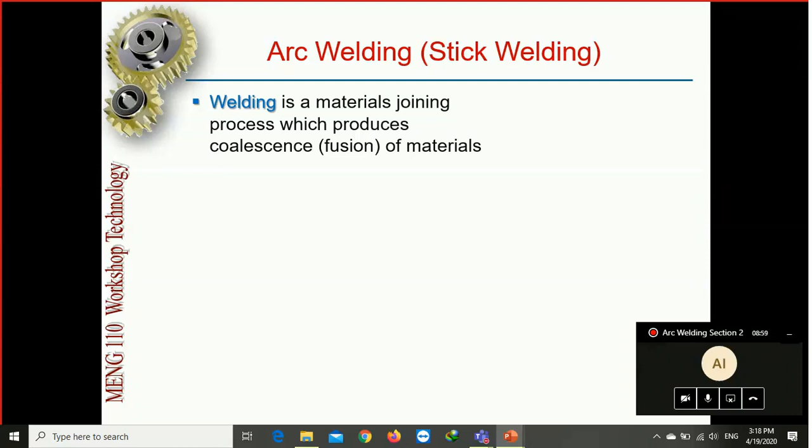Now what is welding? When you are joining two materials together by fusion, the metal will be melted and joined together. So that process is known as welding. We'll be heating the metal up to a suitable temperature, and due to the heat the metal will melt and get merged into each other. So that process is known as welding.

So how can we do it? By heating them to a suitable temperature. This can be done with pressure or without pressure. We can also use a third material, or we can melt the same material.

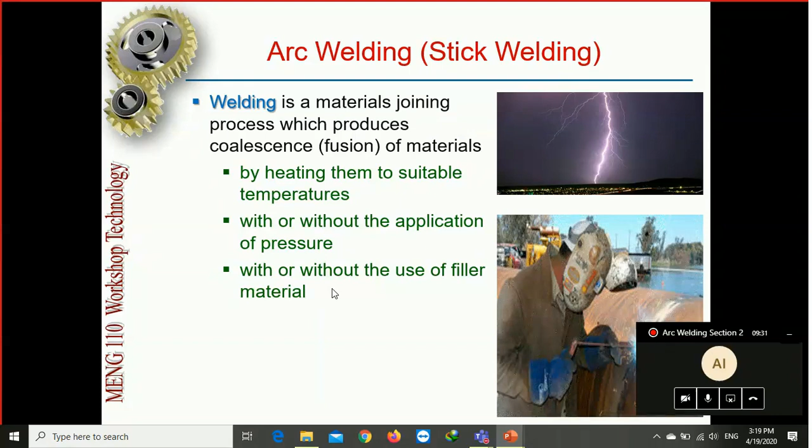So whenever you are welding, these are the safety precautions you need to take care of. There should be a face shield. Always you have to use a face shield, and in some welding you need to wear gloves. Not in all welding, but in arc welding you will wear gloves.

So what are the safety PPE required? Overall, safety shoes, face shield and gloves. And never touch the electrode with your bare hand. Always touch it with gloves, not with your hand.

So the material, wherever we need to join, we'll keep it together and heat it so it will melt, and after melting it will get merged into each other, and then we will allow it to cool. So after cooling they both will join.

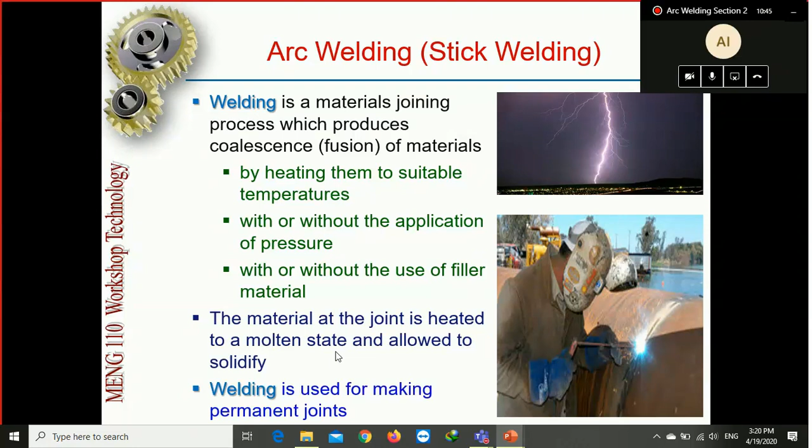So the joint which we are making by welding is permanent, that we cannot break. If it is a screw and thread, nut and bolt, that is a temporary joint, but by welding it is a permanent joint. So we cannot disassemble it easily. We need to break the joint if we need to separate it.

So see what are the equipment required. This is the safety shield. Then goggles, sometimes goggles are required. If safety shield is there, goggles are not required. If safety shield is not there, we will wear goggles.

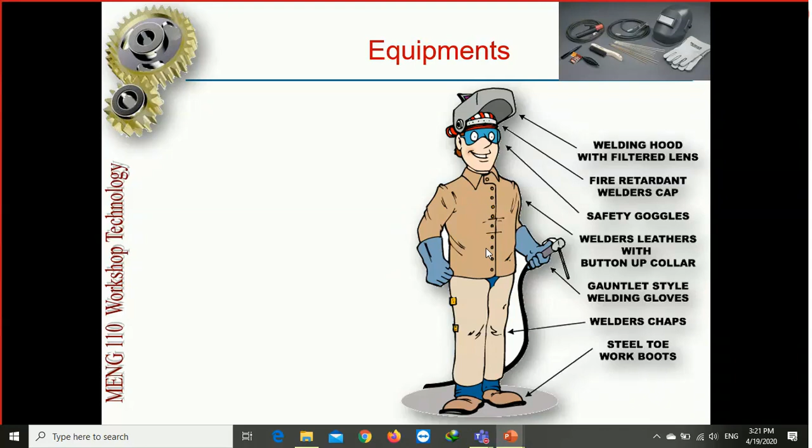Overall, leather gloves, not ordinary cloth gloves. We will wear leather gloves. But welding gloves, welding chaps, and steel toe work boots, safety shoes. So these are the equipment required before welding: safety shoes, overall, leather gloves, and face shield or safety goggles.

Then whenever you are working, what are the requirements for welding? So to produce the electricity, to produce the heat, we need electricity. So from where will the electricity come? From the generator. The generator can be direct current or alternate current, DC or AC.

Then there will be two cables from the generator. One will be connected to the work table where we will keep our workpiece, and the other will be connected to the electrode rod. So you can see this cable. This will be connected to the generator, and the work table also will be connected to the generator. One for work and one for electrode, and electrode holder.

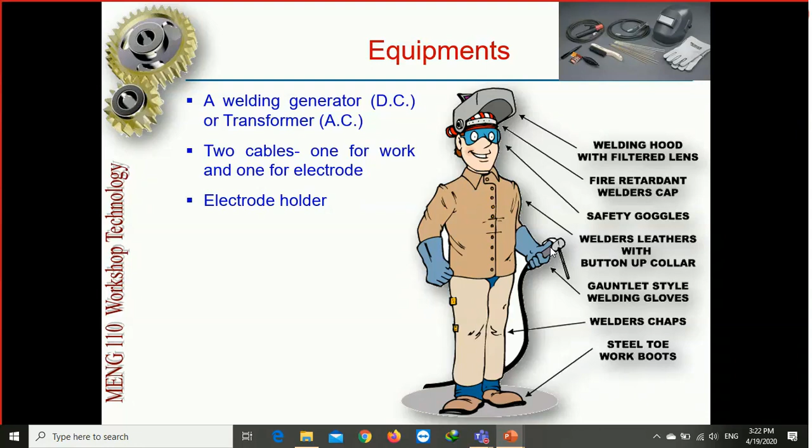Now this is the electrode. To hold this we need an electrode holder, which we will be holding with our hand. Electrodes for welding, then protective shield, gloves, wire brush.

Now after welding is done, there is a lot of carbon on the weld. So to remove the carbon, we will use a wire brush, not with your hand. We will use a wire brush.

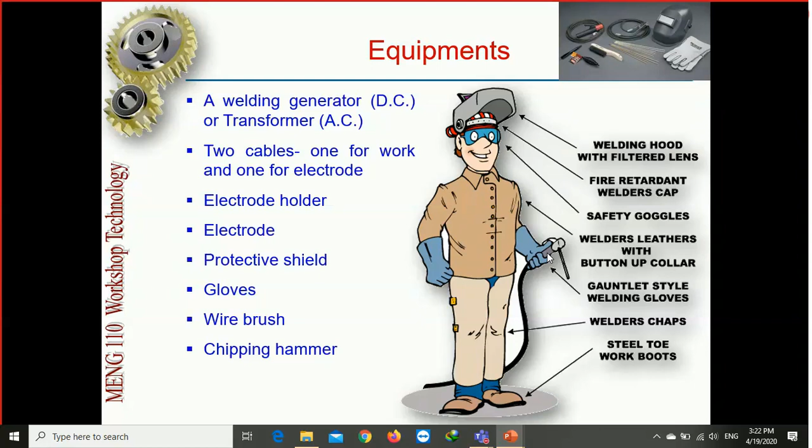Now the carbon is accumulated on the joint. So first we need to break that carbon. After breaking, we can clean it with a wire brush. So for breaking, we will use a chipping hammer and goggles.

See, in welding there is fire produced. So always you should wear proper clothing. If you are not wearing proper clothing, any accident can happen and you can injure yourself.

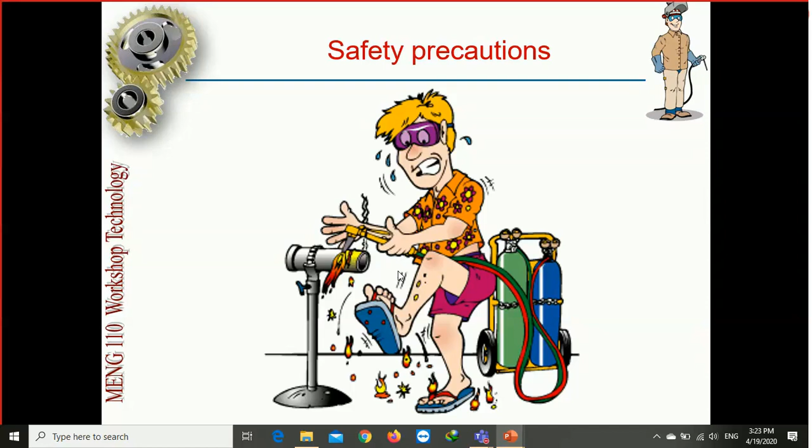So this is gas welding. See, he is not wearing safety shoes, he is not wearing proper clothing, so he can get burned with the fire.

So PPE are a must: all protection, welding gloves, welding overall, apron, everything with safety shoes, welding screen. In some welding, in gas welding, there is no welding screen. But in arc welding, the topic for today, there is a welding screen. We need to hold a face shield. That is the welding screen.

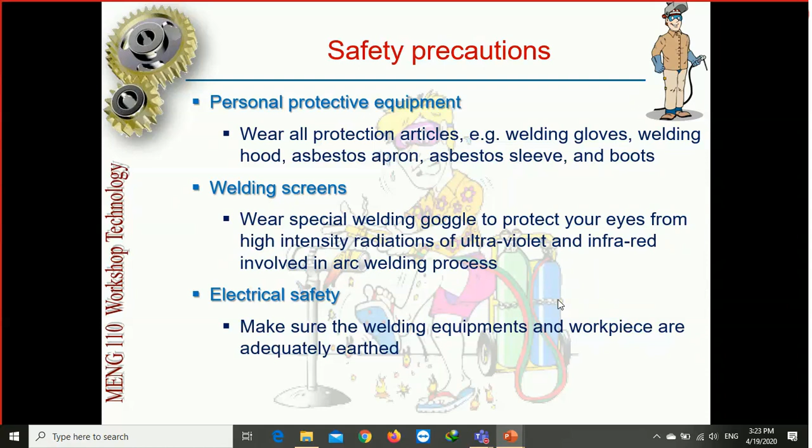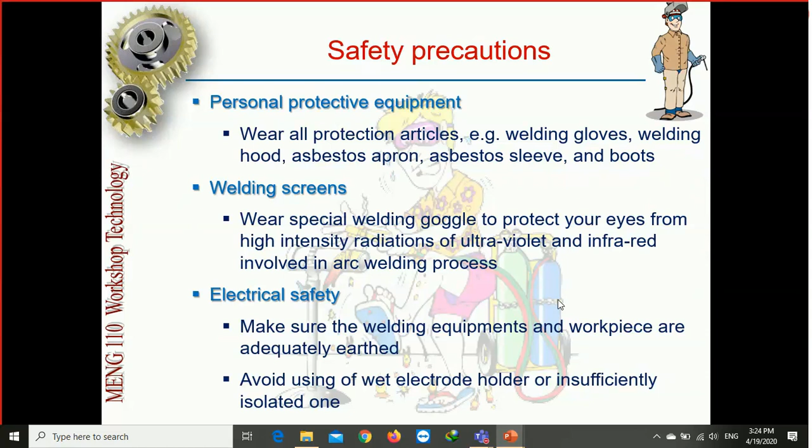Then electrical safety. All the equipment should be properly earthed, otherwise there are chances that you may get a shock. So you need to make sure that the earthing of all the equipment is proper, and the electrode, that all should be dry. It should not be wet.

So these are the hazards which can happen: shock, then due to gases, then burns, then due to rays you can damage your eyes, and if very less space is there you can hurt yourself, you can fall somewhere, your hand can come anywhere, the gas pipe can burst. So these are the hazards which are possible in a welding area.

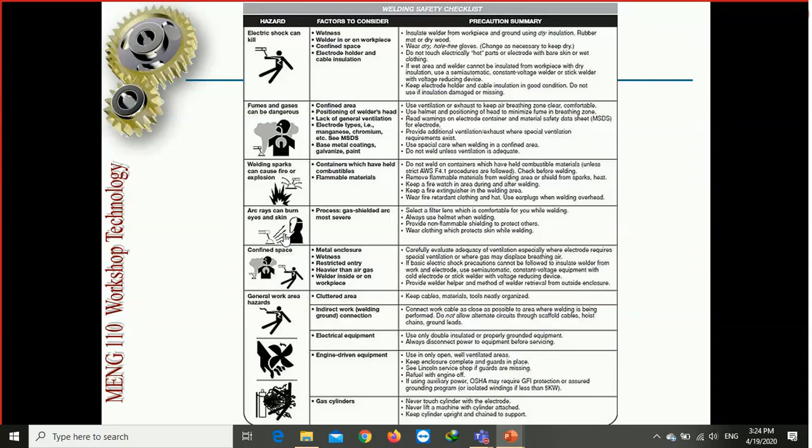Mostly the hazard which occurs is our eyes get infected due to the arc rays. If we see it without goggle, we can damage our eyes. So always we need to wear goggle or safety shield.

Now when we bring this electrode near the work, then a closed circuit is formed, and due to the closed circuit, electricity flows through the circuit and heat is generated. So due to the generation of heat, the metal gets melted, and after melting we can join it as per our requirement. So this is how it works.

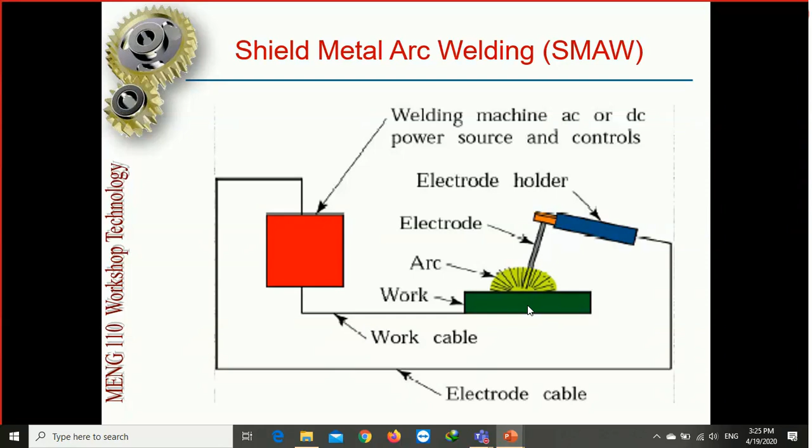Generator, two wires, one to work table, other to electrode holder. Electrode holder, electrode, and that will be brought near to the workpiece. So when we bring it near, a closed circuit is formed, the current will pass. Due to the current, the metal will melt and get fused with each other. So this is the process.

So when we bring the electrode near the workpiece, an arc is formed. An arc is struck between the electrode and the metal. So due to the arc, it heats the metal to a melting point. Now when it is sufficiently heated, we will remove the electrode, which will break the arc. The molten metal will get fused with each other, and then we will allow it to cool. After it has cooled, it will be joined with each other.

So how is an arc? The arc is like a flame of intense heat. So due to the large amount of heat passing, electricity passing through, large amount of heat is generated. That is generated as electrical current passes through a highly resistant air gap.

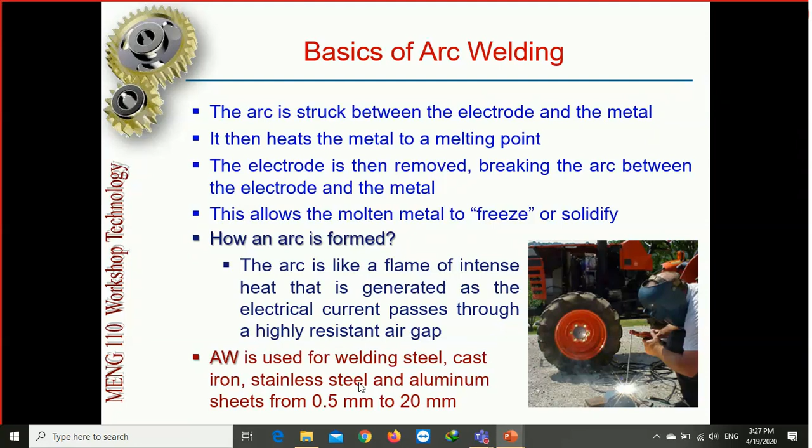Now arc welding is used for welding steel, cast iron, stainless steel, aluminum sheet from 0.5 to 20 mm. So all these places we can use arc welding. Now there are many different welding types, we'll look in further chapters.

Now see, this is the workpiece, this is our arc, this is our electrode. When we bring this electrode, the heat is generated. Now due to this heat, the metal will get melted. So here you can see this is metal and slag. Slag is the waste, the excess carbon, which we will remove by chipping hammer. So due to this arc, here the metal and slag will be generated.

Now during this process, gas is generated. This is the molten metal, which after we remove this electrode will freeze, and after freezing it will get welded to the other part. See, this is the welded joint. So as we move, the metal will be melted and the metal will be welded. So after we have completed, the excess slag, the excess carbon, will be broken with a chipping hammer and then cleaned with metal wire.

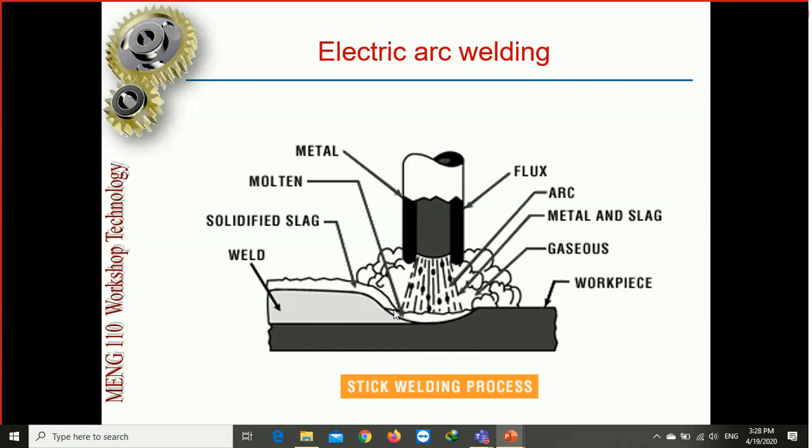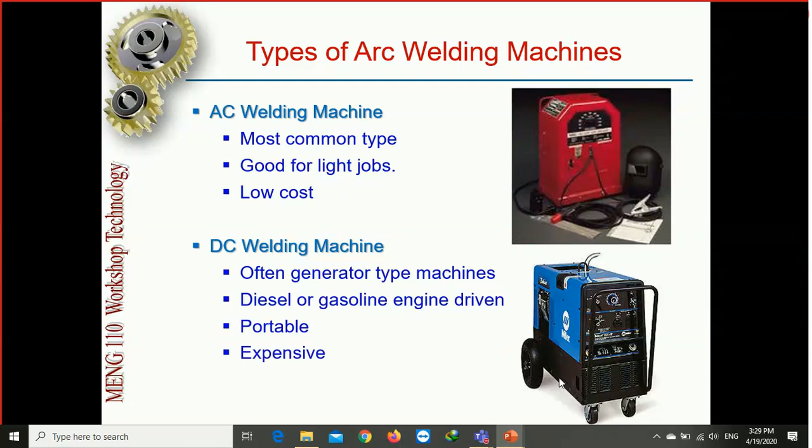Now what are the advantages of welding? It is the most efficient way. If you are using screw and bolt, by removing the screw and bolt we can break the joint, but this is the most efficient way. Once you have joined, it is permanent, you cannot break it. Very low cost, and we can also work for lighter weight. So only the material will be used at the joint, remaining material will not be affected, and it can join all commercial metal, and we can get different designs with this.

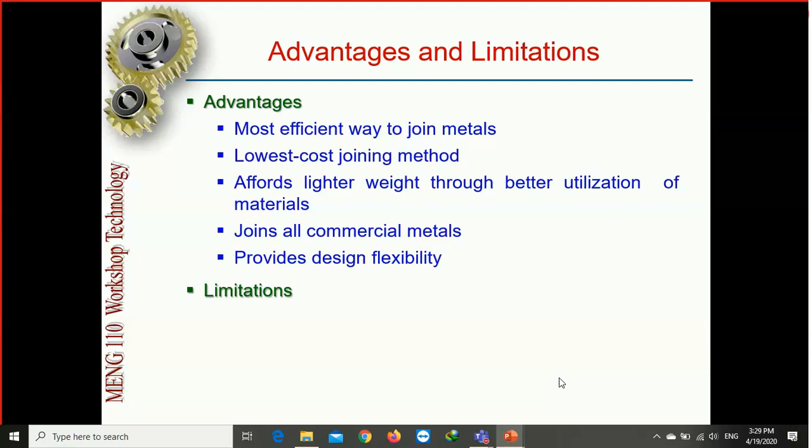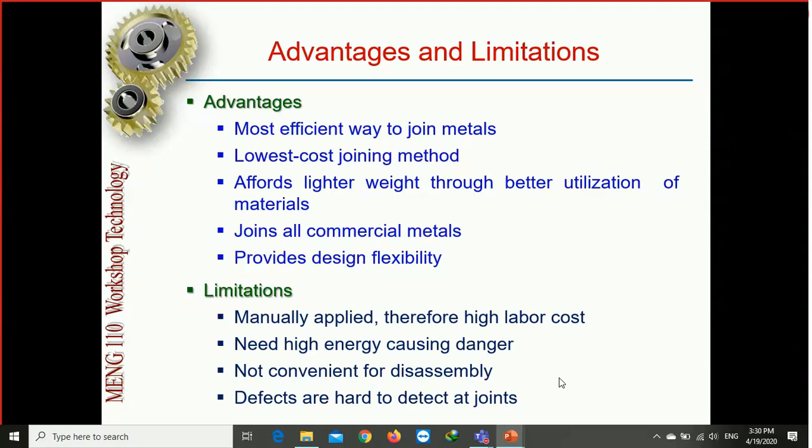This has to be done manually, it cannot be done by machine, so labor cost is involved. Then we are using electric current, so higher energy, and whenever electricity is there, danger is always there. If we need to break it to disassemble the part, we need to break the joint, which is not convenient. And if while welding any defect occurs between the joint, once it is welded, we cannot detect that defect. There will be some cavity inside, but due to the welding we will not be able to detect that defect inside the joints.

These are the joints which you can use whenever we are joining two parts together parallelly, and that is called a butt joint. We'll keep two parts next to each other and take the welding rod between these two parts. When the welding rod passes, it will melt the electrode at the end and join these two parts. This is a square butt joint - if it is straight, it is square. If the shape is a little tapered, it is a single bevel butt joint. And if it is tapered from both ends, it is a double bevel butt joint.

Then corners - if you are keeping both next to each other, it is butt. Now if you are keeping one vertical and one horizontal, making an L shape, then it is a corner joint. If you are keeping one material on top of the other, it is a lap joint. If you are welding keeping two edges together, that is the edge joint. Then for T, if you are keeping a vertical material on top of a horizontal material, it forms a T, so it is a T joint.

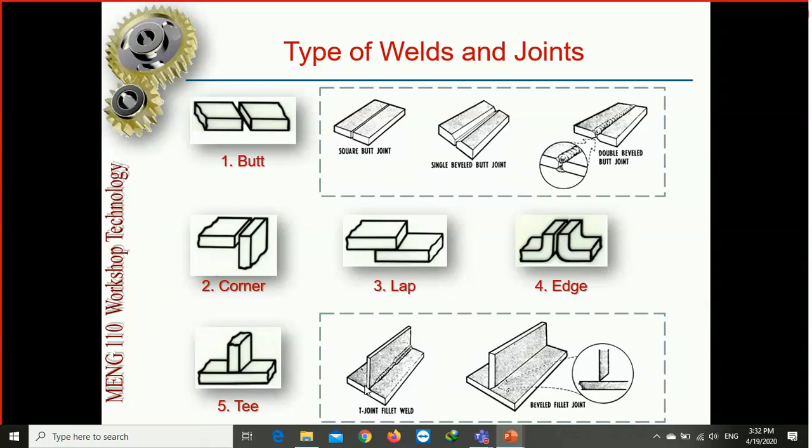See how we can join - we'll keep the material in a standing position and pass the welding rod here. As you pass the welding rod, the corner ends will be joined. These are the different joints: butt, material next to each other; corner, one vertical, one horizontal at the ends; lap, one above the other; edge, at the edges; T, one vertical on top of horizontal. So these are the different types of joints.

Now for which material do we use which joint? If the material is a very thin sheet, we will use a square butt joint without any filler rod. If the material is thin, we will require less current, and the traveling speed should be fast, because if you travel very slowly, the whole material will get melted. So at low current we pass at higher speed, and the electrode diameter should be fine.

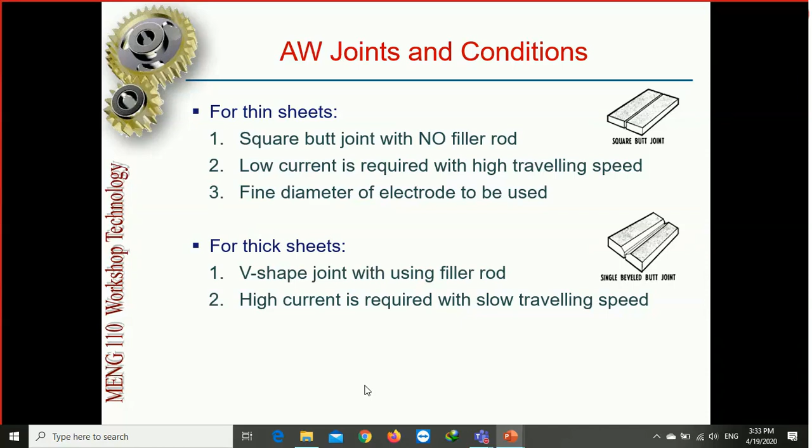If the sheet is thick, we will use a V-shaped joint like a bevel joint, such as a single bevel butt joint. And if the joint is thick, we will require high current for the material to melt and join with each other, and the traveling speed should be slow, because if you travel fast, maybe some metal will not be melted and joined. So we have to take high current and travel at a very slow speed, so that all the material gets melted and joined with each other. And the diameter of the electrode should be more.

Now different power supplies can be used - one is constant current power supply, the other is constant voltage power supply. Voltage is directly related to the length of the arc, and current is related to the amount of heat. So if we have to weld a very long arc, we will use constant voltage, and if we need high heat, then we will use constant current power supply.

So this is the circuit. This is the power source, with one connection to the electrode holder and one to the work table. From the electrode holder comes the electrode, and it will form a closed circuit. So when the circuit is closed, current will pass and it will melt the metal, making it join with the other.

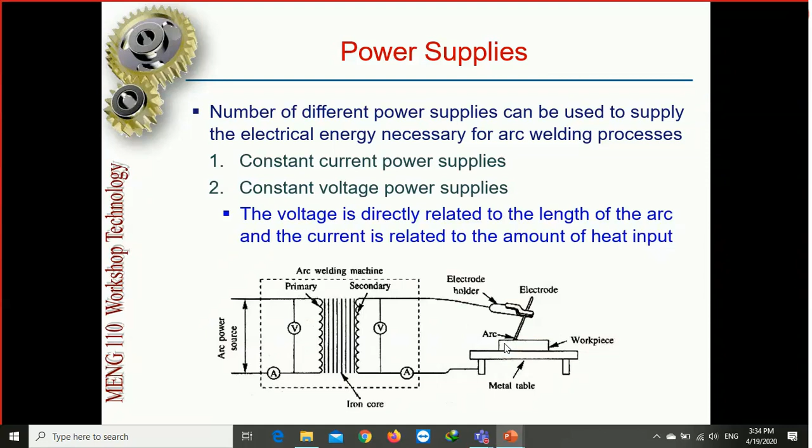Now where is constant current power supply used? It is used for manual welding processes such as gas tungsten arc welding and shielded metal arc welding. We can use different electrodes, like gas tungsten electrode, depending on that we use different power supplies. We use this because they maintain a constant current supply, so if we need a constant high current, we use this type of power supply.

It can be difficult to hold the electrode perfectly steady, and as a result the arc length and voltage tend to fluctuate. Due to the hard current, sometimes our hand will get distorted from the precise location. So due to this, we will not get a constant length, the welding length will be broken, we will get a break in between the arc. So with constant current supply, we will not get proper arc length, we will get constant heat but not proper length.

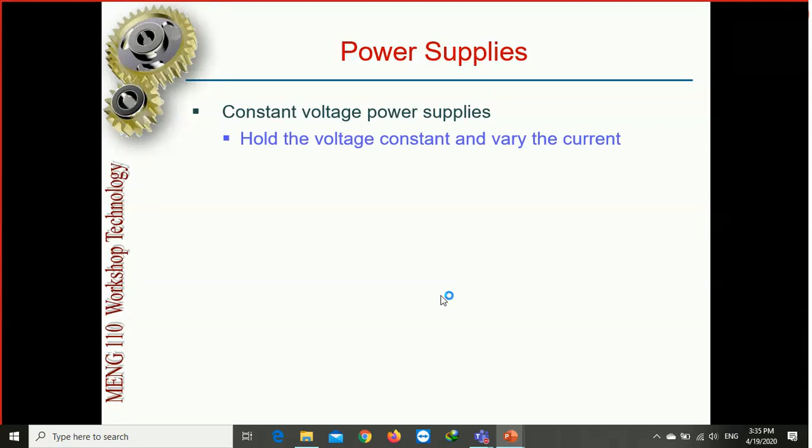So if we need constant length, we will use constant voltage power supply. It will hold the voltage constant, so current will vary, so we can pass it in a single flow and get proper arc length.

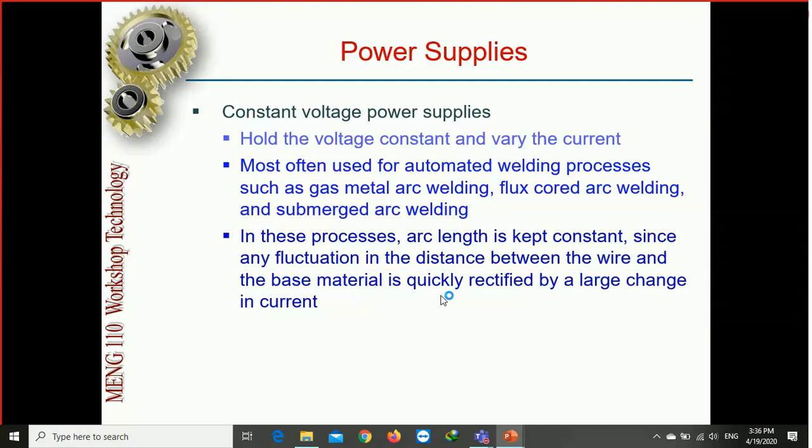It is used in gas metal arc welding, flux core arc welding, and submerged arc welding. The arc length is constant because there is no fluctuation, since any fluctuation in the distance between wire and base material is quickly rectified by a large change in current. So if our hand is getting distorted, the current will vary, and it will provide a constant voltage.

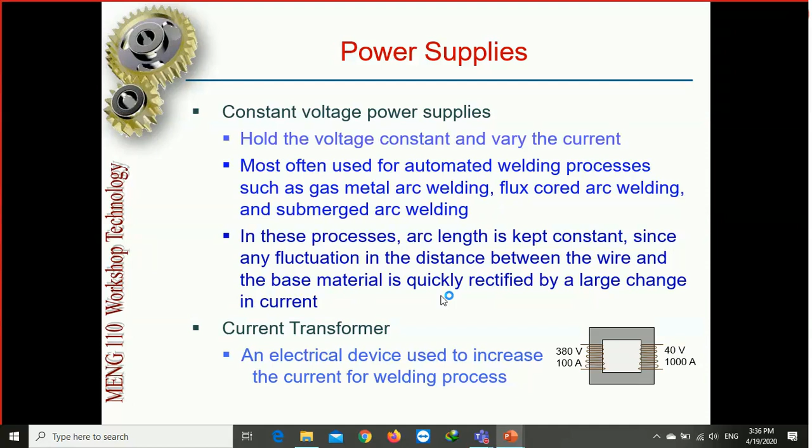Then the current transformer is an electrical device used to increase current for the welding process. So to maintain a constant current, we will use a transformer to balance the electric flow. What does the transformer do? It gives us a constant current.

So what is an electrode? It is an electrical conductor. What does it do? It helps to pass the current, used to make contact with a non-metallic part of a circuit.

It is coated in a metal mixture called flux. This flux accumulates on the joint and needs to be removed. Flux is a chemical powder that coats the electrode. Due to this flux, whenever welding occurs, gases are produced from the burning of this flux. So flux gives off gases as it decomposes, to prevent weld contamination.

It also purifies the weld pool and protects the formation of weld slag. It protects the weld pool against the atmosphere, because after welding the metal is in a molten state, and there are many chemicals in the air that can react with the molten metal and form different structures. To prevent that, the flux adds a protective layer so the molten metal does not mix with atmospheric chemicals.

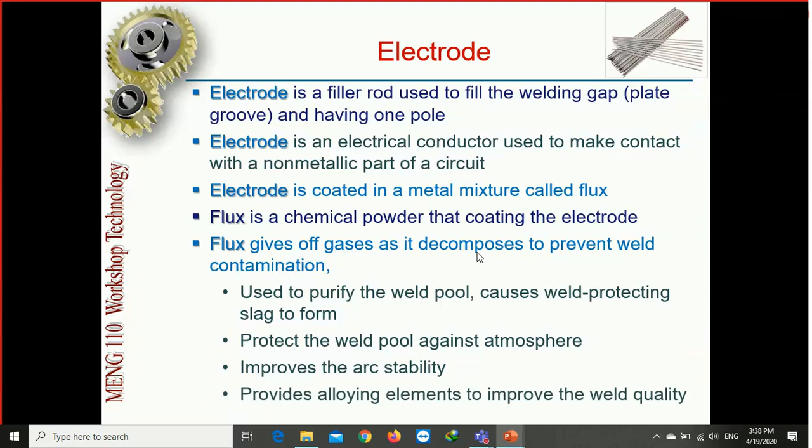It also improves arc stability, and it provides alloying elements to improve weld quality.

Sometimes the electrode itself gets consumed, and sometimes it is intact, only used to pass the current. In a DC system, the weld rod or stick may be a cathode for a filling type weld, or anode for other welding processes. In DC we can consider it either as a positive anode or cathode for the current to pass, but in AC it is not considered as anode or cathode.

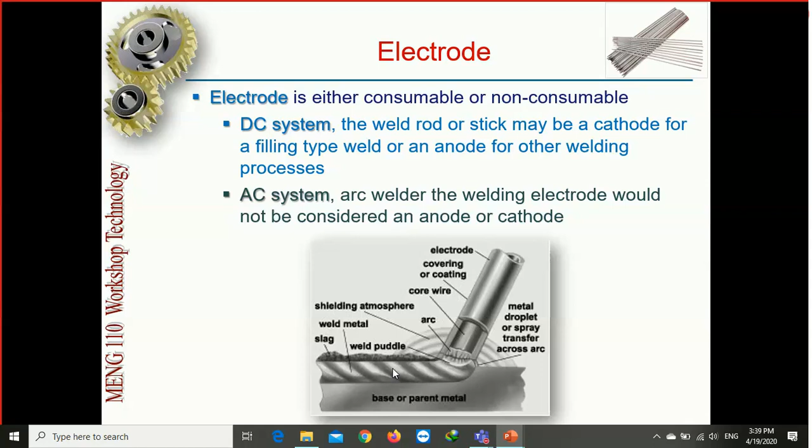This is the electrode. As it comes near the metal, the top area will melt and form a layer. This top part is the slag which we need to remove, and this slag protects the welding joint from the atmosphere.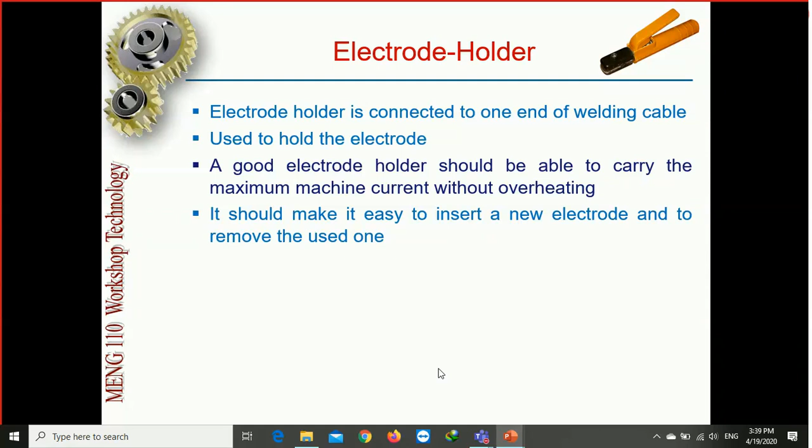This is the electrode holder which is used to hold the electrode. A good electrode holder should be able to carry maximum current without overheating, and it should be easy to insert and remove a new electrode inside it. An electrode holder is connected at one end of the welding cable to the power supply, and it is also insulated against electric shock, so it is properly grounded.

This is how the electrode holder works. The electrode is held between the electrode holder, and the other end is connected to the power supply.